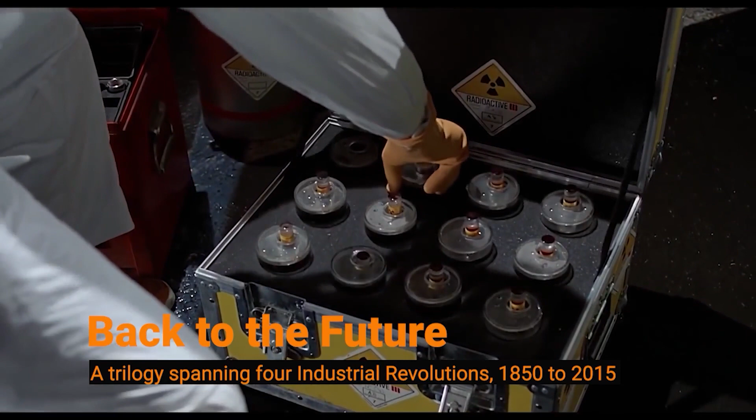Those of you in the young generation especially, I don't know how many of you have watched the movie trilogy Back to the Future. It is actually a very interesting study of the 4 industrial revolutions, because it takes you back and forth in time between 1850 and 2015. Even though it's a fictional movie, it actually captures a lot of those changes very appropriately, and those shifts that we're talking about are depicted. So we can see that within that short period, we have had 4 industrial revolutions.

Now, how does it affect the built environment? The built environment is actually a response to population growth, to urbanization, to globalization, and so many other things. And this built environment is actually the backbone of economy and society. Development is measured by infrastructure development, and infrastructure development spurs economic development and so on. So they are both interlinked.

As you can see very well, whenever we see any country developing, the first thing we see is infrastructure: the roads, the buildings, the bridges, the communication infrastructure, and so on. So infrastructure is kind of synonymous with economic development. So physical infrastructure, for which civil engineers are responsible in a significant manner, is the key. We have seen this from the historical perspective: whenever somebody wants to make a statement, they will build something. And we have seen it over and over again.

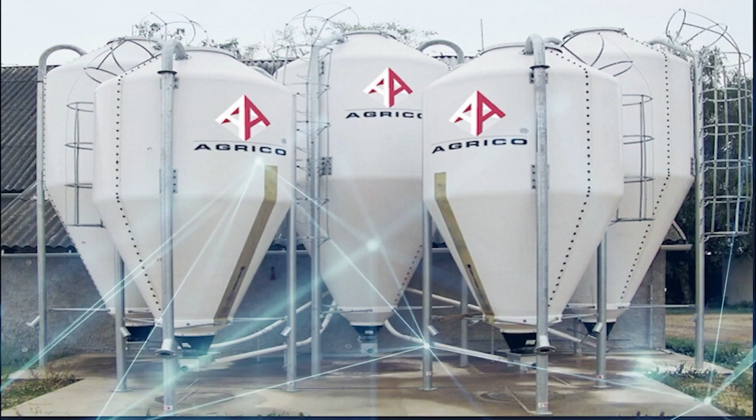And we can see now that infrastructure development is becoming more modern, more innovative, and is changing much faster than before. Materials are changing, and physical infrastructure supports everything that is done. Whether it's mechanical engineers, electrical engineers, communication engineers, they all need physical infrastructure. And that physical infrastructure, obviously, structural engineers have to design. So in a way, if structural engineers do not do their job well, no one else can.

So physical infrastructure supports all kinds of other development, and civil and structural engineers are responsible for designing, building, and maintaining this infrastructure. You can see from here, airports and fields and everything that you pick is all about that. And now we have this vision of the future for vertical cities, because for environmental and many other considerations, vertical growth is seen to be better than spatial growth, since it saves a lot of space, commuting, fuel and many things. Concepts for cities as high as 4 kilometers have been developed, and Dubai Creek, which is under development now, is one of those projects.

So obviously, when we have such rapid development, we clearly need to make it future-proof. That means we can't build these things for just 40 or 50 years. It has to be a long-term endeavor. These structures and buildings have to remain serviceable, always safe, and resilient, which is a much larger concept than safety. They have to be flexible in terms of change of use and adaptable to changing times and environmental effects, and sustainability, of course, is the key. And most importantly, they have to be dismantleable, with end of life built into the design, so that when the building reaches its end of life, it can be dismantled properly.

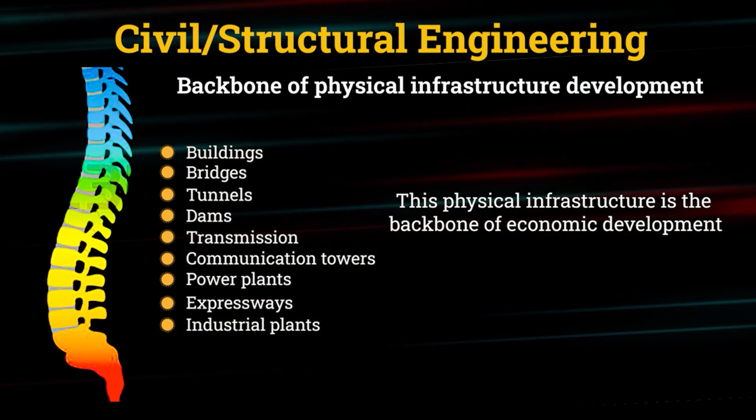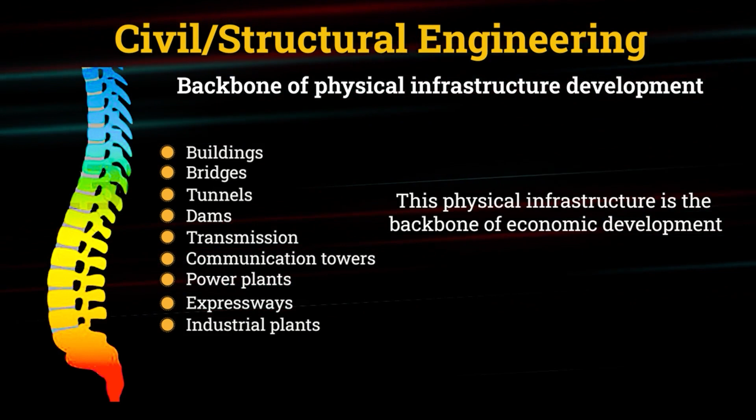So like I mentioned, civil engineering and structural engineering is the backbone of physical infrastructure development, which means buildings, bridges, tunnels, dams, transmission towers, communication towers, power plants, expressways, industrial plants. Everything that you see around us is structural engineers' and civil engineers' domain. So it is very clear that the backbone of physical infrastructure is structural engineering and civil engineering, and physical infrastructure is the backbone of the economy and economic development. So we have a very important position in society, whether we recognize it or not. Unfortunately, we ourselves and the public do not really recognize that as they should.

So now, what can structural engineers do? Most important, number one, is to have a resilient design. And resilient design doesn't mean safety or following the code; it means a much broader concept. We will discuss some of them now, and I'm sure you're already aware of them.

Second one is innovative materials and techniques. And third one, which we will also discuss today depending on the availability of time, is the integration of technology into the work that we do, into how we do it, in what we do. Technology is the key because we have these industrial revolutions rapidly happening. So if we don't bring them into our discipline, we are going to miss out.

Adaptive design, like I mentioned: whatever we do should have the ability to change with times, with needs, with the utility. Life cycle analysis, and this is very important. We often miss that because we think about the design and the construction when we are designing, but we don't think about the 50 or 100 years during which this building or structure will be in use. And that is the real cost that we should be thinking about.

But often we are concentrated, or forced to concentrate, on the construction cost and the design decisions that only affect that, probably at the cost of the life cycle cost. Then collaborative planning: work together with other disciplines. So let's go into a little more depth on resilient design now.

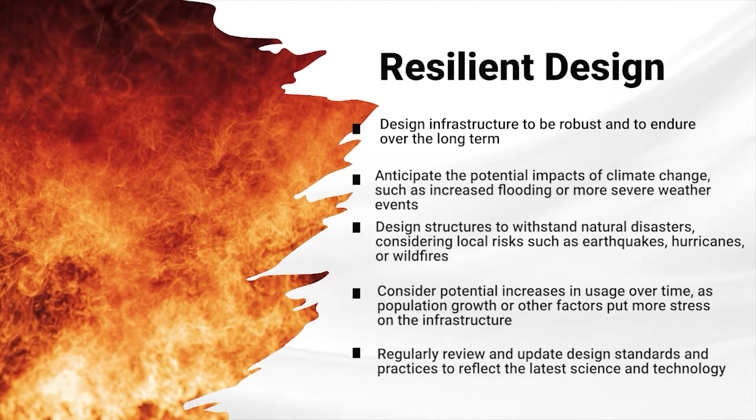Let me just repeat this statement from one of our good friends, Ashraf Habibullah, who always starts his talks with this: structural engineers help to preserve the past, protect the present and build the future. So that's what our thinking should be. How can we preserve the past while we protect the present and build for the future? And all of it begins with the reduction in disaster risk for the built environment.

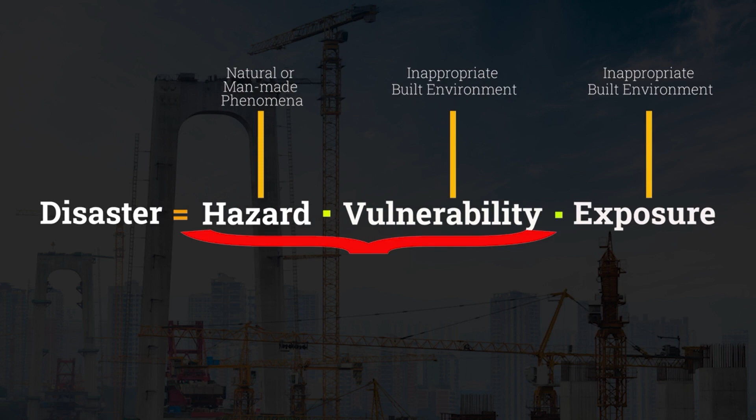If you look at disaster, it actually has, I think, three key components. It's the combination of hazard, vulnerability, and exposure. Now, hazard is something that we may not have a lot of control over. Exposure, once again, depends on the use of the structures, on regulations, on many things. The one thing that we as structural or civil engineers have control over, or responsibility for, is vulnerability.

So inappropriate built environment is one of the key multipliers here, because hazard can be managed to some extent; some hazards can be, some cannot. And people and property which are exposed, once again, are a matter of policy and sometimes beyond our control. But vulnerability and hazard, which combine to be risk, is something that we should think about managing. And if we can manage this, then we will have resilient structures.

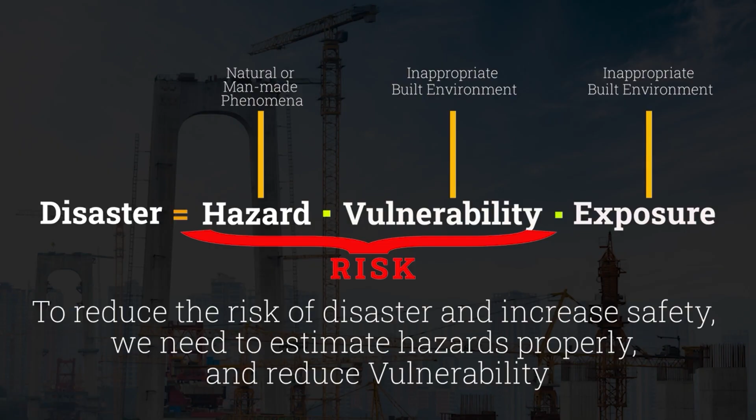As you know, a structure is basically a stepwise integration of materials, which make up the cross-sections, which make up the members, which make up the structures. So whenever we design or take any decision, it must be spread across all of these steps: material selection or resilience at material level, at cross-section level, at member level, at connection level, at their interface, and finally at the structure level. All of these are part of the structure, and every decision that we make must be carefully considered for each of these steps, which relate to design, construction, maintenance, and so on.

And our challenge is to make sure that our structure has the ability to withstand or counter the effects of these hazards or load effects. So to do that, structural engineering has been evolving over time, starting with the intuitive design before the computations, before Galileo, before all those people, when we had the master builder concept. They just knew what to do. And through experience, they have learned it, the tradesmen, and they could almost always come up with some solution.

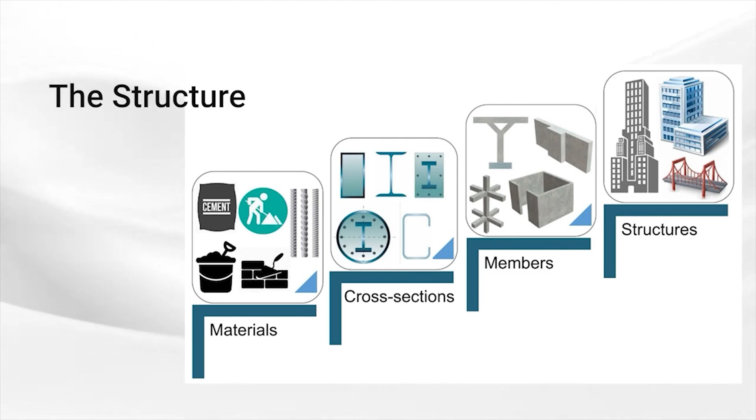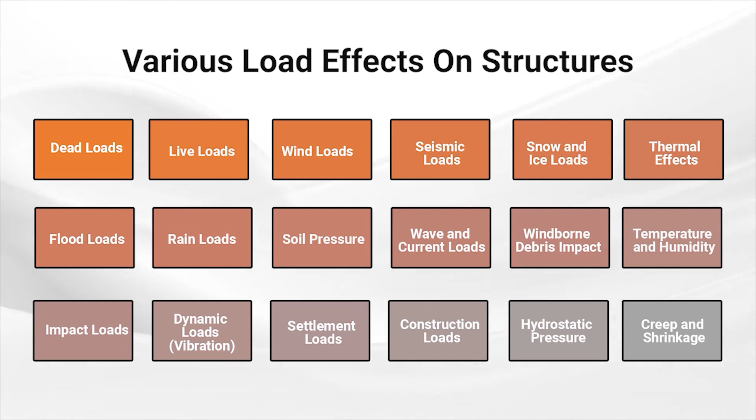Second component, obviously, is the load effects on the structures, which is external. So this one actually leads to vulnerability control. And this one is the hazard side. And hazard side could have many components... (repeated portion of the earlier recording)

So it's a control on both ends. But that was not enough because we found that it was completely putting the engineers in a box, and that didn't work when the structures that we were dealing with did not follow the code limits. Codes are not developed to handle Burj Khalifa's type of structures. They have to be done outside the code.

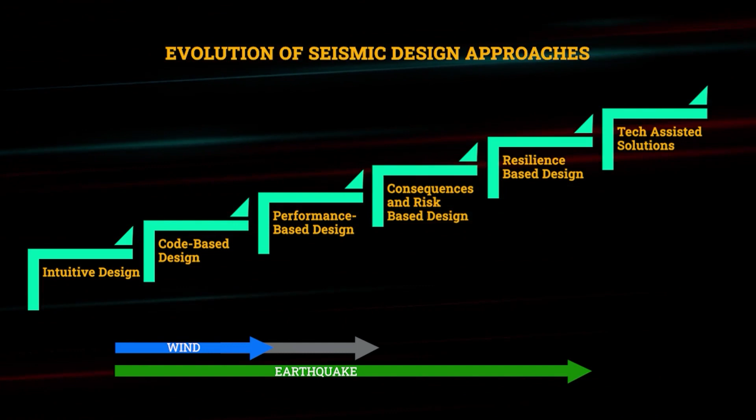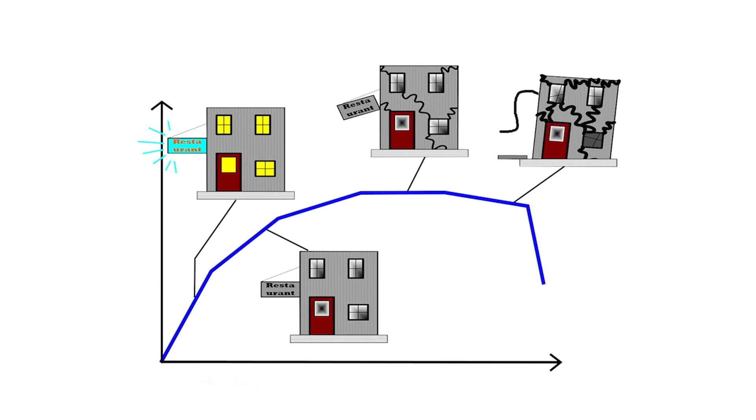And now let me talk a little bit about performance-based design, because that is related directly to resilience. So in performance-based design, hazard and response fight directly and fairly to determine vulnerability. That means we take the codes out of the equation, and we let the real load effects and real capacity or real performance compare with each other. And this is done by advanced nonlinear analysis, nonlinear dynamic analysis, to make sure that we remove all of the factors that we put in the codes and then try to find the real capacity or real performance of the structure compared with as real a hazard as possible.

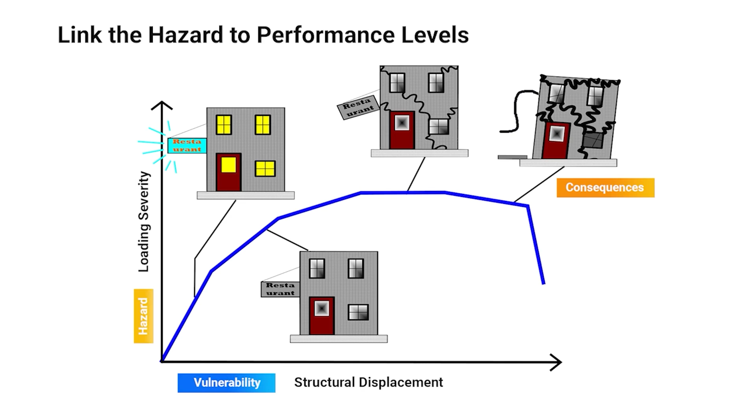Which means that any decision that we make on the left-hand side in the change of material or the cross-section will directly reflect in the performance point shifting. And if there is a change in the hazard on the other side, earthquake, ground motion, response spectrum, it will also show up in the performance point. So we can now fine-tune the two so that they meet exactly where we want them to meet.

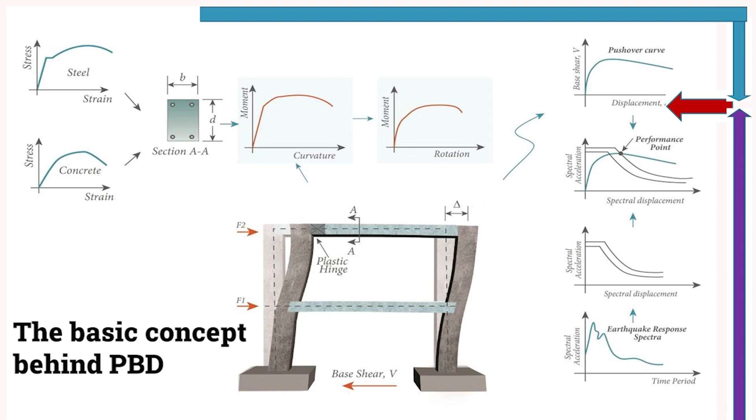So this approach gives us very good control over predicting the performance, so that we can design in a more reliable manner. And we can make decisions that can then be evaluated and compared between the different designs. Because if you just have code-based design, the performance isn't explicit. That's a separate subject we will discuss another time, but let me move on.

So design decisions in this case are explicitly linked to hazard levels and the key performance indicators. So KPIs have to be met, and the decisions have to lead towards the KPIs. This is common in organizations. If you have a job, you have a TOR and you have KPIs. You are expected to do something and you have to perform in return. And that's exactly what we expect the structures to do. These are the KPIs that we have to meet, which will ensure that the structures will perform properly in the future. Stability, strength, deformation, drift, ductility, energy, motion, and many other KPIs can be added.

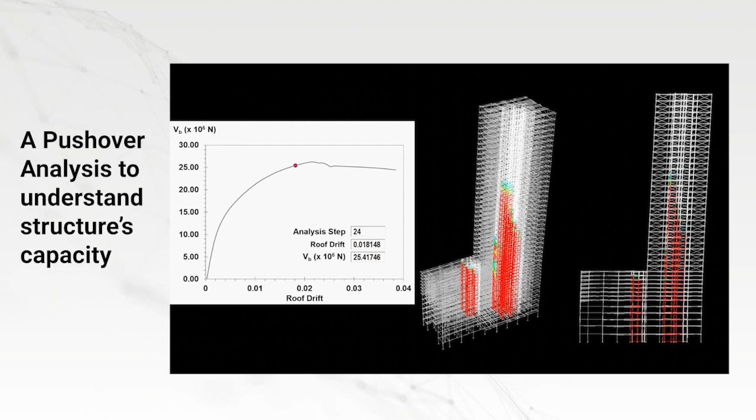So just to give you a quick rundown of how this can be done, this is a simple pushover of a tall building where we can see as the hazard increases, we have the damage in the structure that we can capture, and then we can compare when the damage has exceeded certain limits and what level of damage is acceptable and what level is not acceptable.

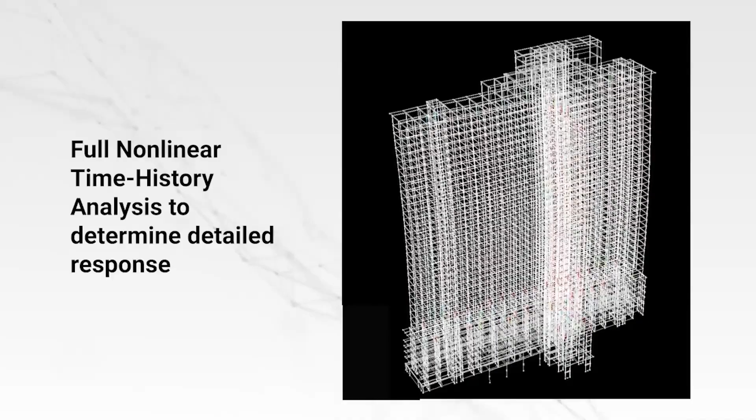Similarly, we can do a little bit more by using time history analysis, so we can do it in a dynamic, nonlinear manner and capture the structure's performance more appropriately and more accurately than pushover and other static methods. So the point is that we have the tools and the technologies to do that at this point. And we can use these to make the structures more explicitly resilient, so to speak.

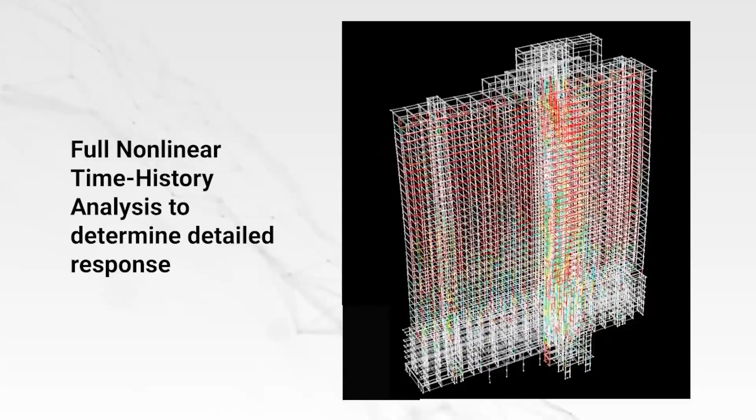So what we need is an understanding of all of that. We also need to have an agreement of the stakeholders, and we need to have the right information. We also have to have the right tools and guidelines, and the ability to interpret these results and determine the performance properly.

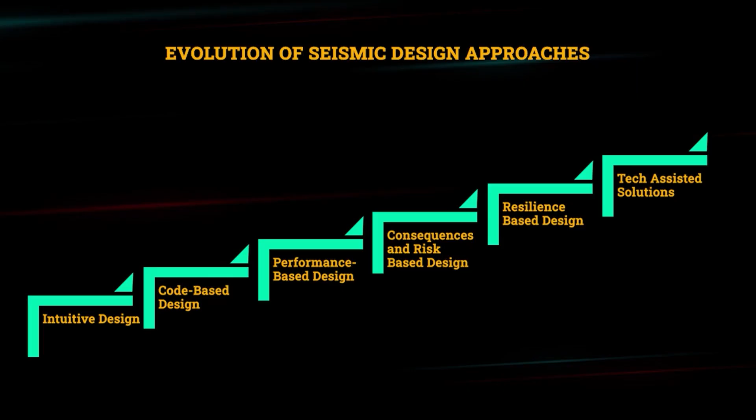And this requires a lot of patience because it's not the traditional way. So it requires us to do things in a very detailed manner. But once we have that, then we have the ability to move to the next level. From performance-based design, we can move to resilience-based design and actually ensure the resilience of not only the structure, but the community that the structure serves.

For example, if it's a hospital, we know that if the hospital is damaged, it will actually immobilize the whole community during an earthquake or during a flood or whatever, because you need those essential facilities. So their performance, their resilience has to be really very high.

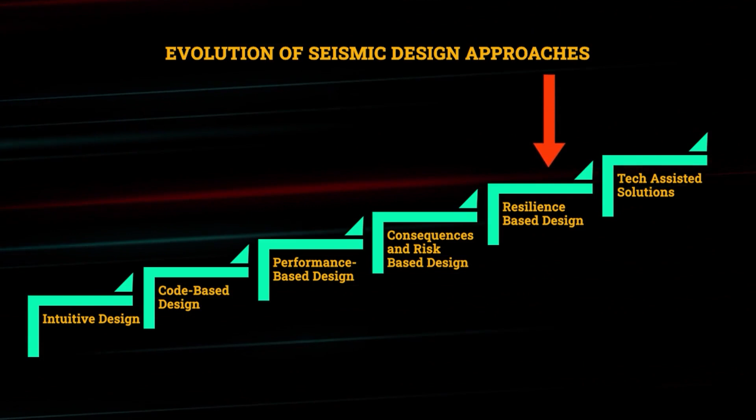So that's why the Resiliency Council was formed. Just like we have the Green Building Council, we also have the Resiliency Council, and the two work in a similar manner to have green buildings, which is environmental, and resilient buildings, which is disaster resilience. So we need structures which are both green and resilient. This combination is clearly indicated in view of climate change and sustainability. We need both because each is affecting the other.

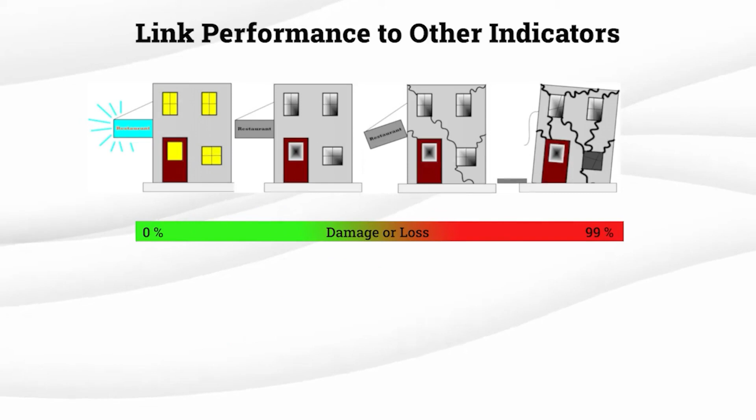And we can now relate the performance or damage or loss to the other indicators. And we can relate that to casualties, downtime, rehab to restore the structures, and so on. And so we can have more confidence in the structure's performance as well as its resilience over the life of the structure and over a range of hazards.

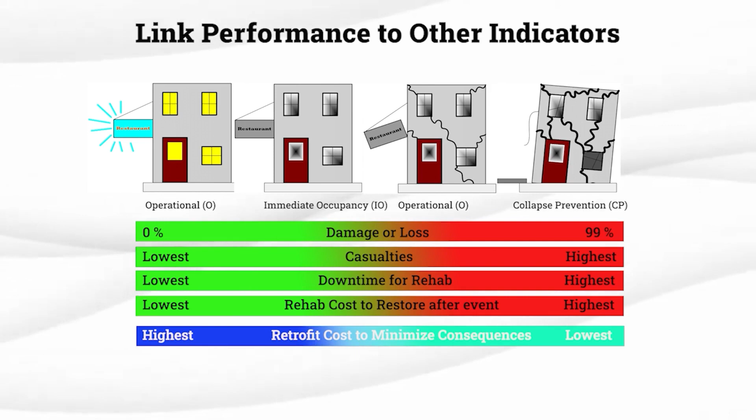Which now brings us to the last step, which is future-proof design. If we have gone through performance-based design, risk consequence, risk-based design, resilience design, then we can move towards future-proof design, because we have the tools and the indicators that can help to explicitly design something which we can term as future-proof.

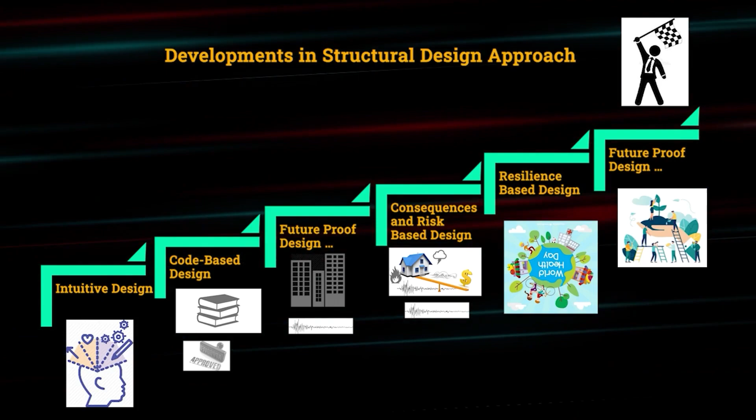If you look at the requirements of a future-proof structure, remain accessible, serviceable, safe, resilient, flexible, adaptable, and compare them against the various design methodologies we have, you can see clearly that future-proof design will meet all these requirements best, whereas code-based design may meet some of them, but not many. So as we go from intuitive to future-proof design, there's a higher chance that we can meet those requirements.

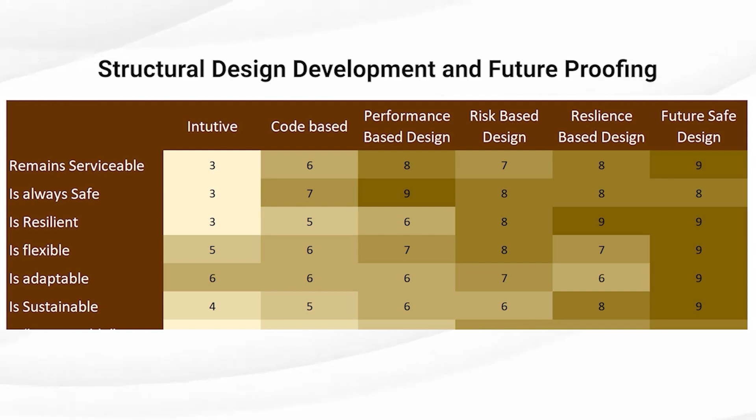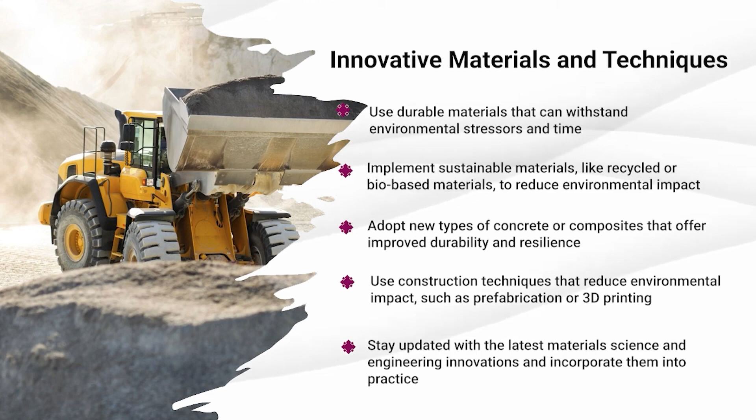And of course, we can do this through innovative materials, durable materials, sustainable materials like recycling, adopting new types of composites and concrete, and new construction technologies like 3D printing and so on. So everything has to come together. It's not only the design. We also have to make sure that on the construction side, there is a development that matches what we are evaluating. So this brings us to a very interesting question, which is the design life.

Most engineers, most people think automatically that we have a design life of the structure of 50 years, 60 years, 70 years. And if you ask the engineers, can you design my structure for 100 years, or can you explicitly tell me the real life of my structure? It's a very hard question to answer. And we don't know what dials we should change to change the design life of the structure.

We have had clients who come to us and say, we would like our structure to be designed for 150 years. And then we sit there and scratch our heads. How can we do that? Because code-based design doesn't really give us any way to evaluate this explicitly. But there are ways to do that.

Without going into detail, material selection for durability, maintenance considerations, safety margins, adaptive design, protective measures, life cycle analysis, and responsive design are part of that. And most importantly, we should design the structure from the beginning to be retrofitted. Retrofitability is not a word; I invented it. If you look for it, you might not find it. It's the concept that you should anticipate that at some point in the future, this structure might need to be retrofitted.

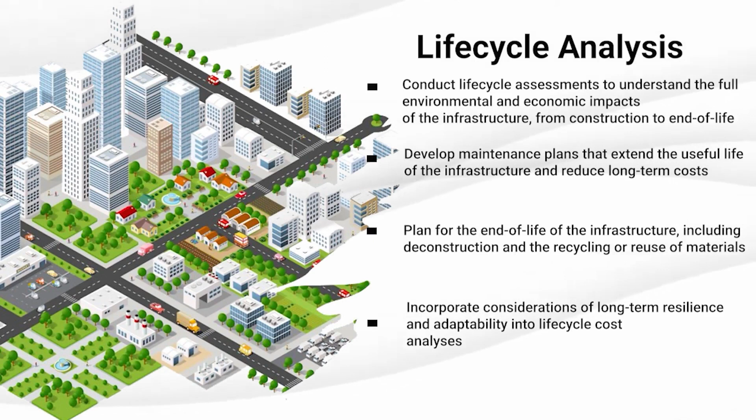So life cycle analysis is very important. We have to conduct the entire life cycle from the beginning to the end. And if you look at the typical life cycle of a project, it's pretty long. It has like 30, 40 steps in there. And as structural engineers, often we are only looking at 3, 4 of them. We are not looking at the entire project life cycle. And that's where the cost saving, the durability, the future proofing, and all of that lies, in all of these steps that we can look at explicitly.

Conception, planning, design, construction, operation, end of life. These are the key groups of the design life. And we are mostly considering the design portion. And during that time, we do not put enough emphasis on the other areas, which actually cost more, both in terms of money and environment.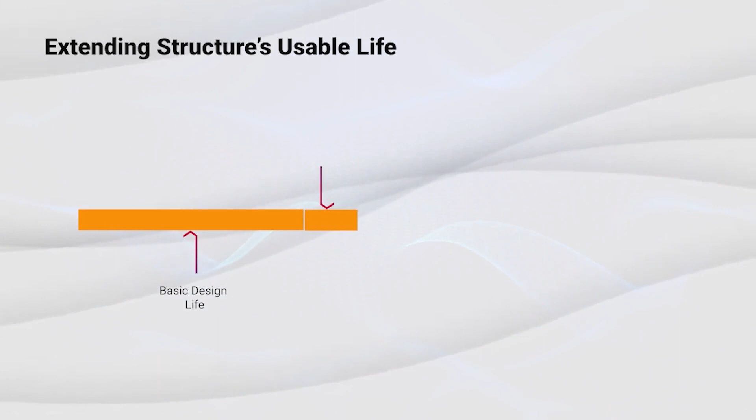So let's take a look at the basic design life. Let's say 50 years, X number of years. And these numbers are not real numerical numbers. I'm just giving a conceptual idea on how the design life or the structure's life can be changed or enhanced. So we have a basic life. Then if we have better maintenance, the life can be improved, because if the structure is going to degrade badly without maintenance, if you maintain it, the life will be increased. That is obvious. That's the first step that we could do.

Second one is improved durability. Concrete cover is increased, concrete strength may be increased, and you have all the durability considerations. The structural life can be extended by improved durability. Next is increased factor of safety, low stress levels. Which means if you do that, your structure is likely to have a longer life, because the stress cycles, fatigue, and other things will not damage the structure as much as if it is designed to the extreme.

Repair, restore, refurbish. If we do see damage, and if it can be repaired or restored or refurbished, then you can extend the life by another 10, 15 or X number of years. And finally, we also have the retrofit, where we can do a complete strengthening and change the entire structure, give it a new life. So all of these steps can change the basic design life to double or triple the originally conceived.

Then we have explicit design for extended life, which is considering a little bit more than that. We even modify the load factors. We modify the hazard levels for the return period of earthquake. Instead of being 475 years or 2,500 years, we consider a longer period. For the wind return period being 700 or 1,700 years, we consider 2,500 years. So we change the return periods of the loads, and we design for the extended life.

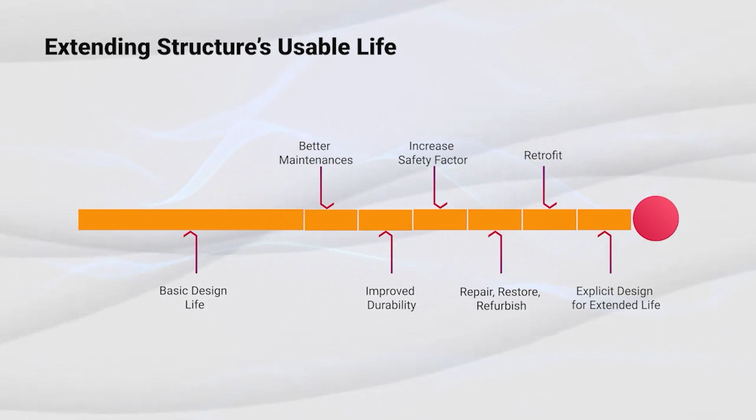But no matter what, there is definitely still going to be an end of life. So we must also design for that as part of the future proofing, that whenever the structure comes to the end of its life, we should be able to bring it down properly. And that is the design consideration for that one. I'm just giving some of them because we have more material to cover. I can share this presentation with you later, on the things that we could do for considering the end of life of structures.

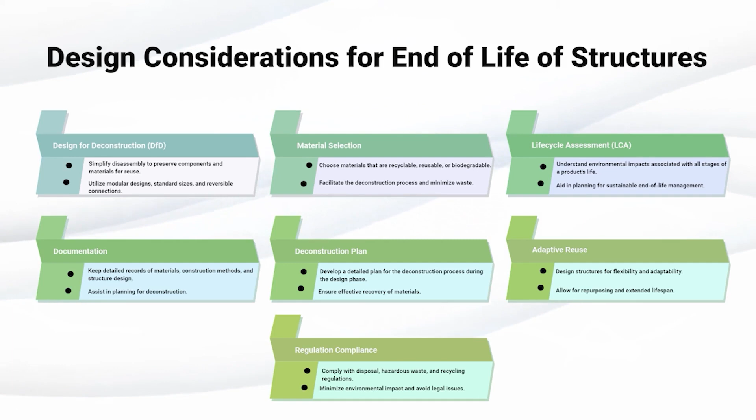Then collaborative planning is very important these days. We have to work with the client, with the architects, with the other people, site-specific consultants, geotech. So this is just one example; we have got to make sure that during this process, we engage more stakeholders.

We cannot do it in isolation, because structure is part of a bigger ecosystem. So if we are going to make some decisions, other people have to also be involved in that decision making and have to participate in that.

So the last part of the talk is about emerging technologies and structural engineering. And this is another part of the future proofing, not only of the structures, but also our own work. Because if as structural engineers, we cannot keep up with the emerging technologies or incorporate them into the work, we will be left behind. We'll be lagging behind other disciplines.

And we have seen so many times disruptions coming to organizations, to disciplines disappearing very quickly. So we have to be conscious that these emerging technologies should help our work and also help the structures and the built environment that we actually make. So there is a paradigm shift in terms of the computers or the computing these days.

In the beginning, when we started using computers, I remember writing programs to automate things we were doing. We were doing something by hand and we wrote a program to make it faster. So it was considered very smart that, oh, I can now do it faster. I can do more. The first frame analysis program was amazing because it could do the moment distribution or whatever, or a matrix analysis very fast.

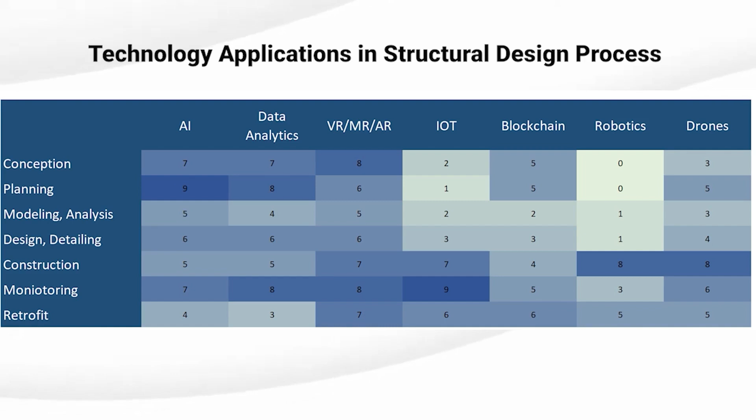So whenever we are doing any part of our work, we can see, okay, these are the possibilities for using technologies. This is the relevance of these technologies in future-proofing the structures. So if we want to ensure serviceability, safety, resilience, flexibility, adaptability, these technologies can also help us or can play some part. So combining our structural design process and the future-proof awareness, we can bring in technologies and integrate them into our work with a conscious effort to make the structures future-proof.

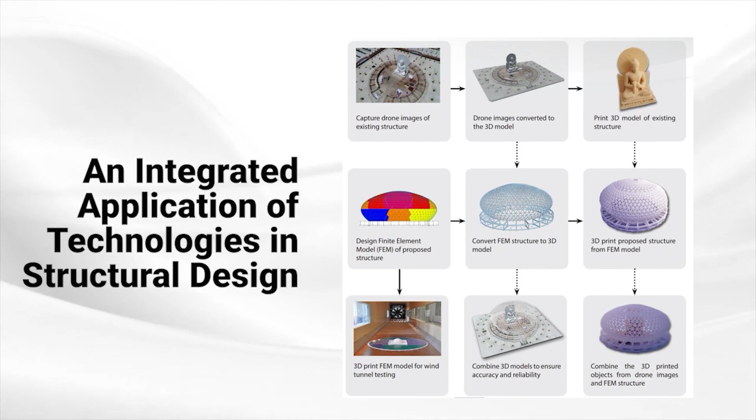I'll give you a couple of examples from our work in AIT. This is, for example, one work in which we integrated many technologies together, drone, 3D printing, finite element analysis, wind tunnel, many things together to design a dome for a large space. We don't have the time, but I'm just giving you an example where integration of technologies can really help to come up with good solutions.

BIM is one of the technologies that I think none of us can ignore anymore. And unfortunately, structural engineers are slow to adopt this. Architects are much ahead of us. Other disciplines, mechanical engineers, MEP engineers, they are ahead of us. In the entire building industry, we are the last one. Structural engineers are probably lagging behind all of the others, unfortunately. So civil engineers, structural engineers, we need to embrace BIM as a basis of managing project lifecycle information and everything.

And I can give you just one example: BIM actually can integrate a lot of information about the structures, about the infrastructure, and, more importantly, point it to a relevant physical entity. So we can link the information to physical entities, and that's the key, that we have a relevance of the data to physical entities, and that makes all the difference. So all the data sheets basically link to something that you can capture, you can think about, or you can physically manage. So that's why connecting BIM to our work process is very important.

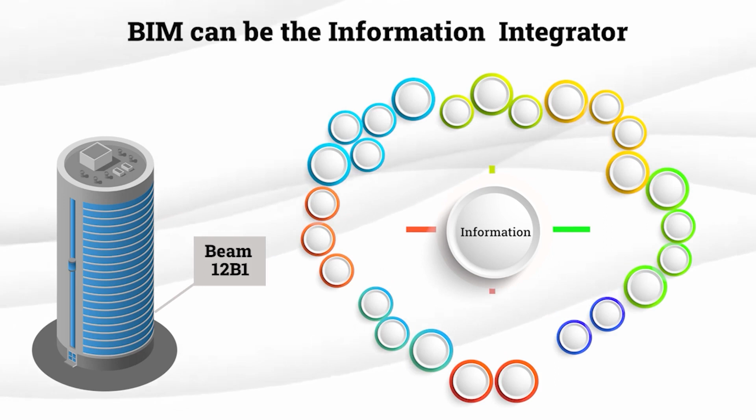And as you know, those of you who are involved in BIM know that BIM has several dimensions. We used to talk about 5D BIM. Now 6D, 7D, and up to 10D BIM is already in development.

So we are talking about BIM for not only shape and drawings, scheduling, estimating, sustainability, maintenance of structure, safety, for lean construction, and most importantly, post-construction hazards and other aspects. So everything is now integrated all the way through the life cycle using various dimensions of the BIM.

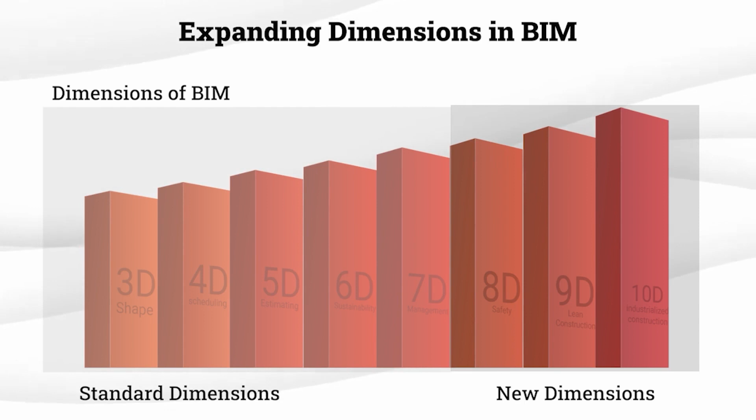At the same time, the level of detail in BIM is also increasing. From level of detail 100, we are now at a level of detail of 700, which means extremely detailed information is now embedded in BIM models. At some point, we were very happy to have a 3D model. That is our level of detail of the structural element. Now you have structural elements, plus reinforcement, plus connection details, plus fabrication, plus all of those issues related to that.

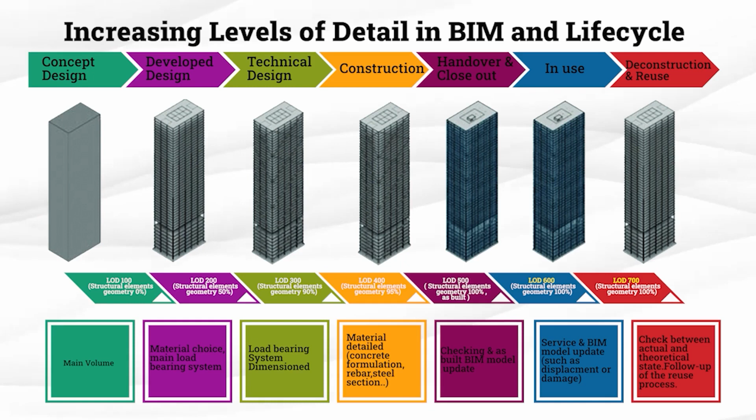So combining the dimensions of BIM and the level of detail in BIM, we almost have unlimited capacity to manage this information and make use of this information in everything that we do. And in fact, this is one of the focuses of our company, the one that we set up in Bangkok right now, CSI Bangkok, looking into BIM and integrating it into civil and structural engineering.

Next one, of course, is AI and machine learning. A few years ago, when I used to talk about AI and machine learning, people didn't really realize or recognize the significance of this one. But since ChatGPT, or since these large language models, since last November, the world has changed. And if we don't recognize that, then we are missing something. Because everything that we thought about the future is actually here.

These last few months, the adaptation of AI in everything is absolutely mind-boggling. We cannot even keep track of what's happening. So AI is absolutely now here, finally, in the sense that there have been a couple of times that AI came and went and came and went, but now it seems that it is finally here. So using AI, we can do a lot of things. For example, we can do quick decision making, estimating.

Now, I'm sure everyone here is familiar with ChatGPT or similar large language models. So right now, as engineers, I'm sure you have heard about prompt engineering, the new discipline coming up, self-created. There is no such discipline. People have just started to call themselves prompt engineers, and people are making a lot of money by writing in their CV that I'm a prompt engineer and getting paid. Basically, what it means is how to interact with AI.

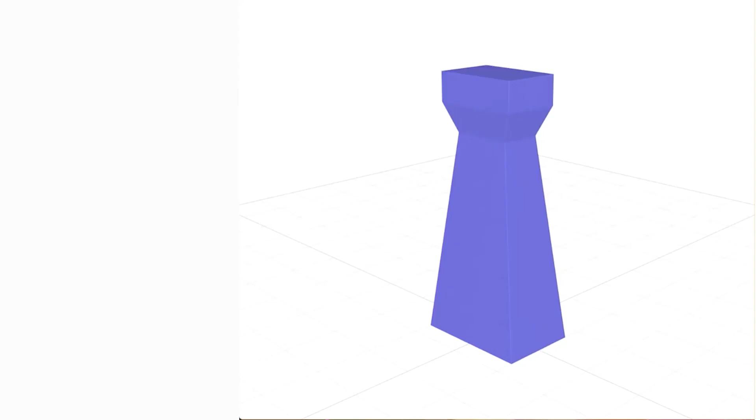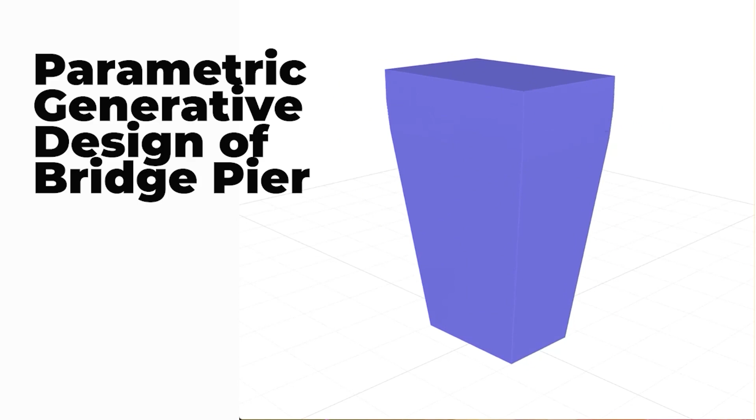So generative design, and I'll give you just a very quick example of what can be done. For example, if you want to design a bridge pier and you want to size the cross-section considering aesthetics and the golden rule of proportion, and you want economy and formwork and everything, you could create a parametric generative model and go through various variations very rapidly through this generative design process until we find the solution that we are looking for.

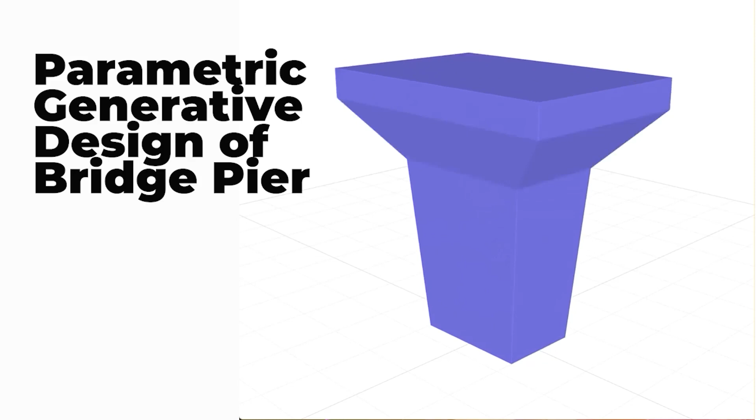So basically, it's a parametric design which looks at all of the realistic variations of parameters until it finds the solution that we find acceptable. And we can extend that to, for example, even the reinforcement inside. So as you change the form, the reinforcement also can be adapted, and then we can find the quantities and the capacity and everything at each cycle.

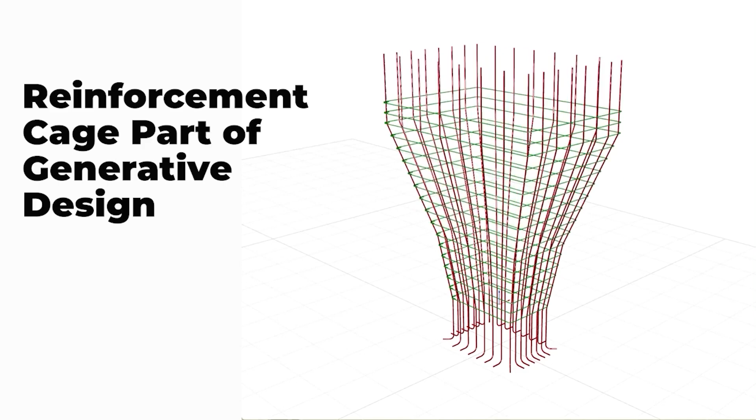So the generative design can not only look at the form, but can also look at the cage inside at the same time, which means look at the capacity, look at the performance, and look at everything, so we can complete the entire cycle. So, for example, this could be used to come up with the most beautiful or economical or efficient design of a bridge pier, as a small example.

Big data, another one, because everything, as you know, is about data. There's more data now in one day than there was all in history before that. So we need to be aware there is some value in this. Companies are built, businesses are built on using data at this time. And we as structural engineers, civil engineers also need to make use of that for our projects, for our work and our profession.

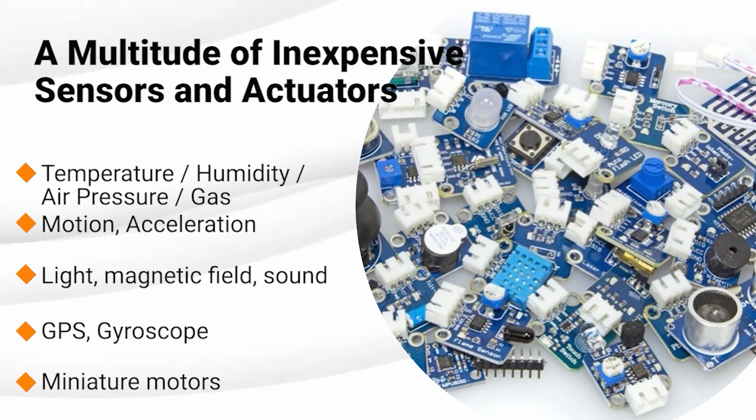Sensing technologies, once again, it is very, very important that we use sensors effectively in our structures because they provide a lot of opportunity for monitoring of what is going on, short term as well as long term. And together with the IoT, we can have a lot of information. Sensors have become so cheap that it is unbelievable. As you know, our cell phone has all kinds of sensors, including the acceleration sensors and temperature sensor, humidity, whatever. So about 25, 30 sensors are built in, which we could always access for doing a lot of work.

Blockchain-based applications, we can connect things to what's happening. We can document them. We can create the ownership. So big data and blockchain themselves have provided us a lot of opportunity to actually manage our work in a very, very controlled manner. And already other businesses are using it. And as engineers, we also can make use of these technologies.

Drones, we all are fascinated by the drones and the images created by drones, the models created by drones. They can help us in a lot of things. In fact, I was quite surprised that one of our papers that we published a few years ago on using drone for construction management received about 10 times more readership than our papers on structural design. It seems that people are much more interested to read about the application of drones to construction than application of structural engineering and performance-based design, for example. So this is an area which everybody wants to use.

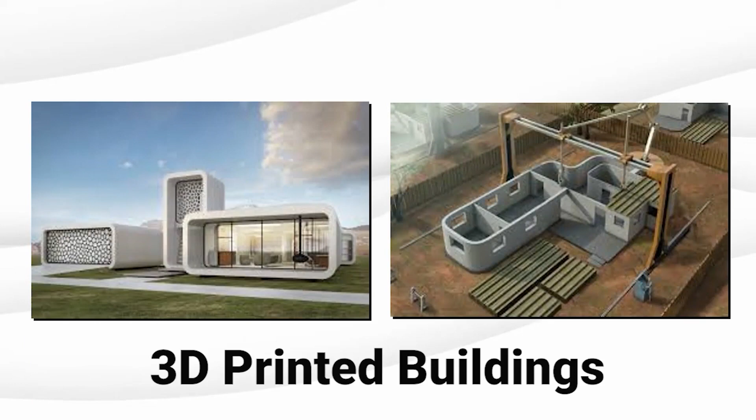3D printing is related to all the other technologies together. IoT, once again, sensors, IoT, structural health monitoring, they're all part of the same big equation. And then we have the convergence in terms of the cell phone, where we can bring all of these things together because everything that we do, we can connect it, or we can control it, or we can bring it back to this device.

And we have the smart cities on a larger scale where everything converges. So it's a convergence of planning, engineering, technology, management, mobility, energy, retail, everything. So smart city, the way we look at it, is actually a culmination of everything, because every discipline, every technology has to come together in an integrated manner to create so-called smart city.

So I have a few slides about what we are doing about this at AIT. In this portion, I want to go into slight depth of some of these areas because many ideas we touched upon, but we didn't actually show examples of how it can be done and how it is done. So I want to show some of the research done at AIT by our group on some of these applications so we can see some examples, and then maybe we can see that what we're talking about is not just talk, but actually it is applicable.

So first of all, the design, development and future-proofing. At AIT, mostly we are working a lot on performance-based design, risk-based design, resilience design. We don't do much work on code-based design, but we do a lot of work on the other part of the design process. So I just want to emphasize that the focus of AIT's current work is on performance-based design, risk-based design, and resilience-based design, and obviously future-safe design.

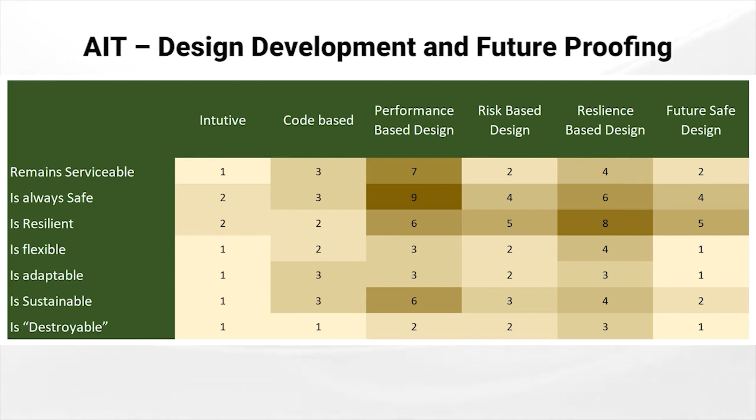So now I want to give you some examples of some of the theses, some of the research, some of the projects in this area, so we can understand how this could be relevant, or how some of that could be done in our own universities in Pakistan. So once again, the relevance of our work with future proofing.

So let's see, first of all, this is a thesis done by one of the students using a data analytics approach to estimate the efficiency of the structural design of tall buildings. Because when we talk about future proofing, we have to look at efficiency as one of the indicators. So how do you define efficiency? What is efficiency? And how can we determine efficiency through data that we have collected?

So this basically focuses on, first of all, defining the efficiency parameters, then defining a way to evaluate efficiency, and then defining a way to compare efficiency between various types of structural systems and structural members. So this research is quite useful because it helps us to explicitly think about data and efficiency and how we can compare two structures in terms of their efficiency in various aspects, including climate change and sustainability.

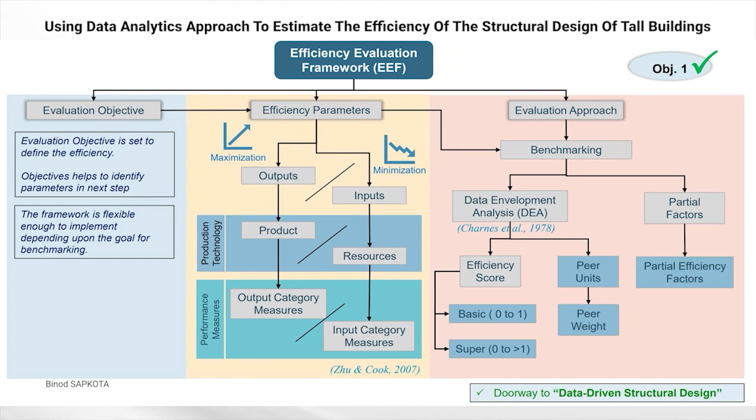This is by Ashish, who's actually joining this talk also. He is looking at the calibration of structural models using measured building response. So that's another area where we try to do a lot of work: we measure the response of the actual buildings and bring it back to the models of a building and calibrate them, because when we create a model and do the design, we don't know how accurate that is. We only have an idea of what we are doing.

But if we can also go back and measure the response of the building in use and bring that information back and then calibrate the models so that the models predict the same response as we measured, that means we have removed the modeling errors in our structures. So modeling assumptions, modeling inaccuracies, those can be removed or minimized by recalibrating the structure based on the measurement of the same structure in operation using sensors.

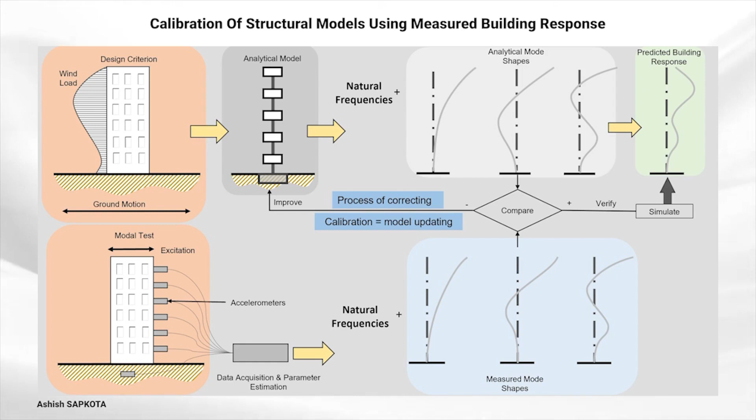And we have been connecting this research to some buildings in the Philippines where sensors have been installed. And this is done, by the way, in bridges quite a lot. The biggest application is in bridges, and a lot of our other colleagues are also doing the same thing with bridges.

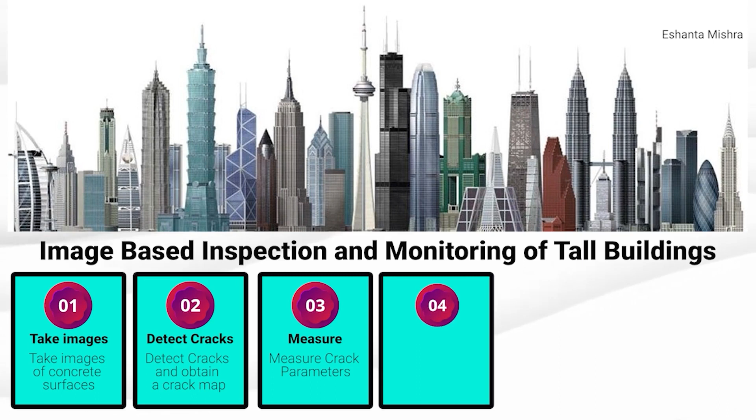Then another one we did using image-based inspection and monitoring of tall buildings. That means if you just take a picture of a surface or a building, then based on that picture, we should be able to determine where it is cracked and what that crack means. Is it a flexural crack? Is it a shear crack? Is it important? Is it dangerous? Or not. So basically by taking images, either through drones or through cameras, we can bring those images back.

We can identify the cracks. We can find the crack width, the crack length, the crack direction, crack pattern, number of cracks. And from that, we can start to see whether the structure is deteriorating or not. And once again, this is related to future proofing in the sense that maintenance, durability and structural health can be measured and evaluated without actually going near. So this is by taking pictures from far and using various techniques to determine the state of the building.

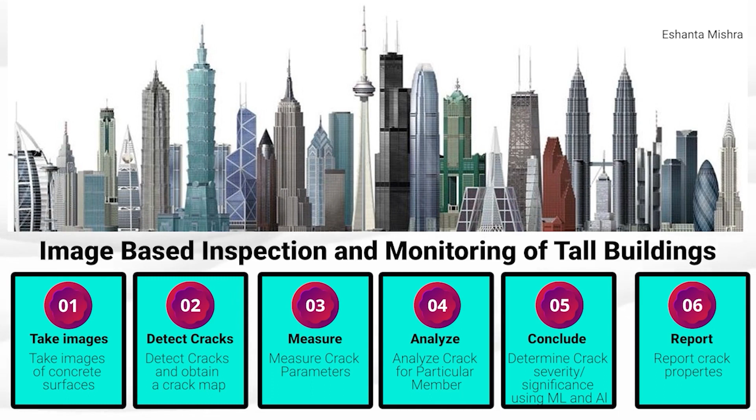Right now, this is focused on cracks. And he was able to identify crack width, crack angle, determine whether it's a shear crack or a flexural crack, and so on. So this combined the technology of imaging and image analysis with structural performance.

Another one is quite important, this thesis on enhancing seismic resilience of non-structural members in buildings. Many times as structural engineers, we are focused on the structural members, the safety or the performance of beams and columns and so on. But in reality, most of the time, the damage first goes to non-structural elements: walls, partition walls, floors, ceilings, glass panels, and so on.

And that damage is actually far more severe to buildings, operations, and occupants than the structure itself. Those of you who have seen the videos from Japan for earthquakes, basically it's things falling down, with the walls cracking, but the structure is intact. But the building is destroyed.

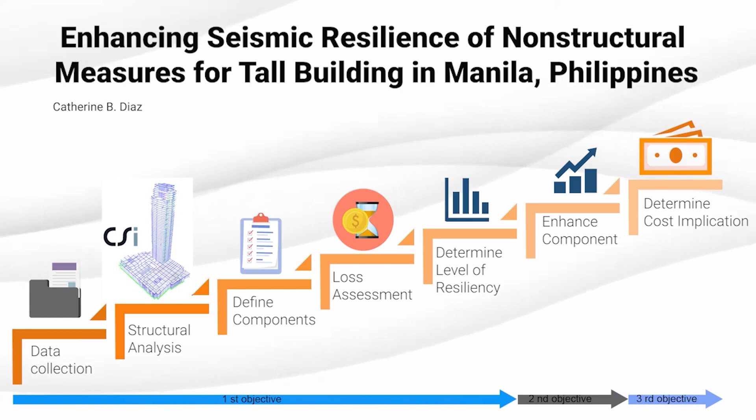So this is connected to using the structural information to determine the non-structural damage and link that to resilience and to resilience design, and to the recovery of the building and so on. So this is quite an interesting work. In fact, we are connecting that to the analysis and design, so this can be automated to some extent.

This is the use of artificial neural networks or AI for the analysis of highway overpass bridges and so on. So there are several theses that we have done looking at the application of AI on various types of structures, bridges, bridge piers, buildings, and so on. Once again, training the networks based on the available data or by generated data.

Another one is structural health assessment of post-earthquake response of buildings. This is a project that we are doing in the Philippines where many buildings are being connected together because by law, every building in Manila, in the Philippines, must have accelerometers. So accelerometers are attached, but their data is not going anywhere. So we are trying to extract that data, connect it, and network it so we can predict the damage to the city after an earthquake.

Not only damage, but what is the impact of the earthquake even before inspecting, because we can correlate it back to the model, like I mentioned, calibration and so on. So this is quite a large initiative. We're trying to work with developers, with the authorities to bring this into operation, but there are many practical considerations which are becoming difficult. But technology-wise, we have already completed this solution.

So this is the sort of block diagram where you have the buildings with sensors, triggered sensors when there is an event or earthquake, and then we have the data collection and so on. And finally, the information goes on a mobile phone to the owners or to the occupants about what happened to the building after an earthquake. Without doing an inspection, we can assess that there's going to be a crack in a shear wall at that floor. So that's the level of detail we are looking at.

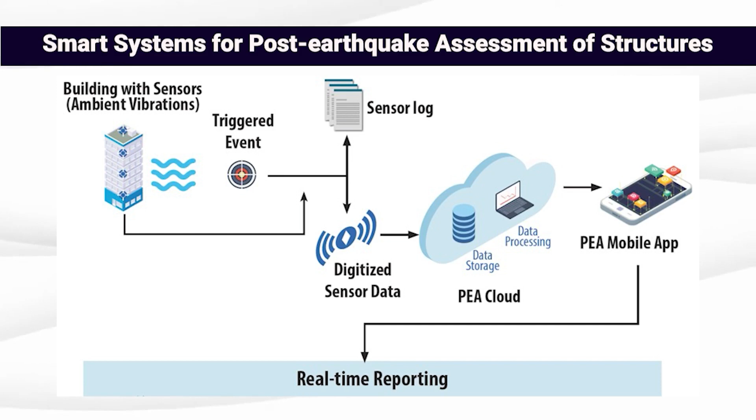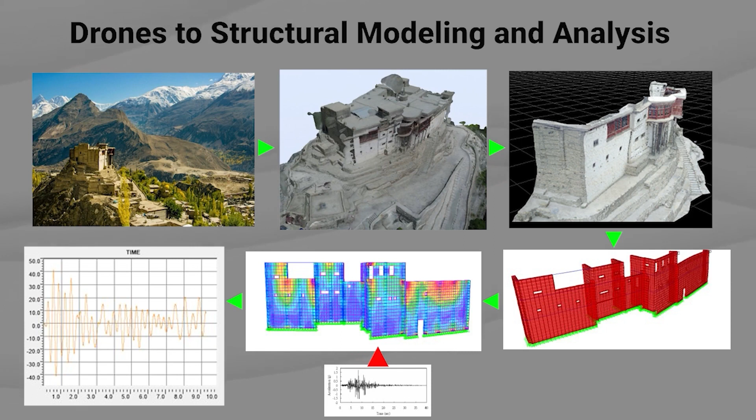This is difficult in practice because many tall buildings, especially, are covered by these screens during construction. Inside, you cannot access. So it's more suitable for bridges and roads and tunnels and drainage systems than for buildings. But this is a very valid way of doing construction monitoring, progress monitoring.

Then there is this integrated digital delivery system, which is beyond just analysis. And this is a project with Singapore that we are doing. The Singapore government has a project called COT, Cities of Tomorrow.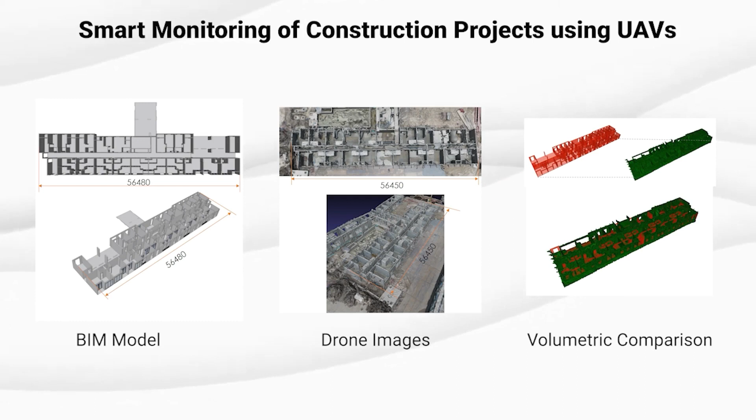And one of that is to use this digital delivery system. That means everything should be digitally done and delivered. No drawings anywhere in the process, no printed drawings to be signed or delivered, only digital information transfer between all stakeholders right to the construction. And that is this digital, and we are part of that project, that we are also developing some tools in that big project.

So having talked about all of that, we should not forget our own profession. Because as professionals, structural engineers, I think we are pretty conservative compared to many other disciplines. And when we interact with many people, we realize that our profession also needs to future-proof itself so that we don't lose this profession in the future.

Although it is very encouraging for us to see that in this year's intake in AIT, the structural engineering program has the highest number of enrolled students compared to all other disciplines, including all engineering and non-engineering combined together. So structural engineering seems to be still of interest to students. So we have the largest number of students enrolled this year.

But to keep that, we need to embrace new technologies, as I mentioned, also think about sustainability and resilience, lifelong learning, interdisciplinary collaboration. We have to make sure, when we go to a project meeting, we always see that architects or town planners, they lead the meeting. Engineers are left behind. We have to have more input or more say in this process.

Adaptable design development, regulation and standard development, public engagement, communication, we lack that a lot. I think we all know that when it comes to public engagement and communication, we lag behind many other disciplines. And obviously, ethical considerations, all of that is something that as a profession, we should be looking at. And future-proofing our own careers, which is an extension of the profession.